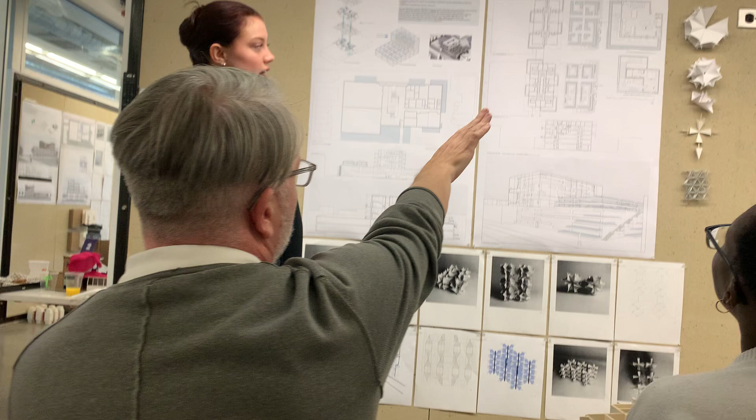No. So to get out to the garden, you'd have to go back down and out and then back up? Or is there an internal way to get up to the garden? No, you would have to come from outside, go out to the garden. Oh, it's just there out there.

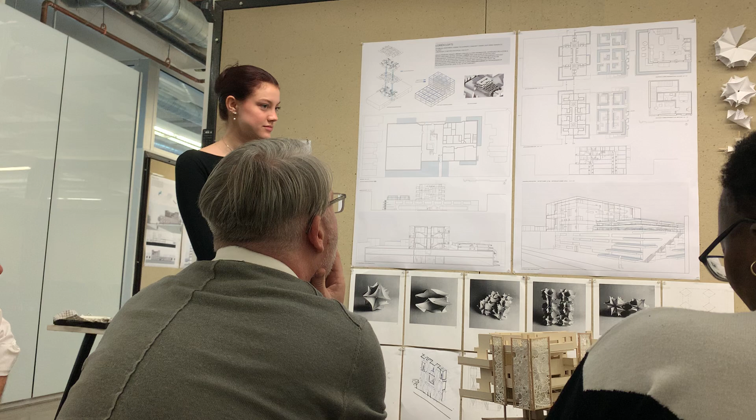And that's because it is for public use, and it's really trying to highlight that anyone off the street could walk up. You're extreme, like you're either all or nothing.

She's taking a position. Yeah. I am. It's an apartment building for hermits. I appreciate that.

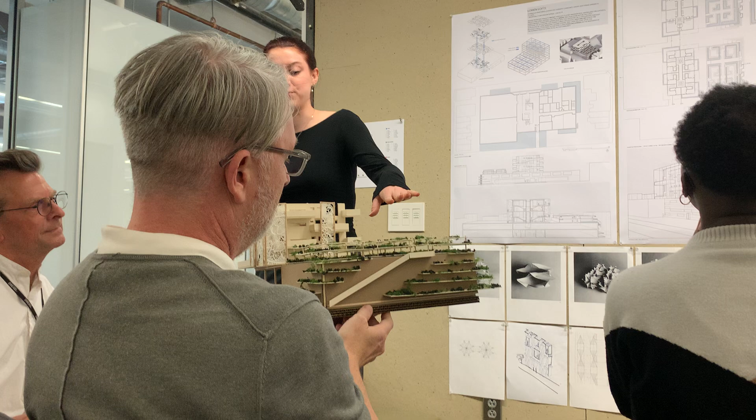I think she thought of it as a point of security, though. Yeah. Security, I'm sorry, because anyone is able to access the top, just keeping it closed off from the residential, securing these spaces from those folks. Yes, got it.

I think something that would get you more oriented graphically is labeling your spaces. That helped, and also you have your third above your fourth, so I was getting them confused. Totally. So, but I agree, I do like...

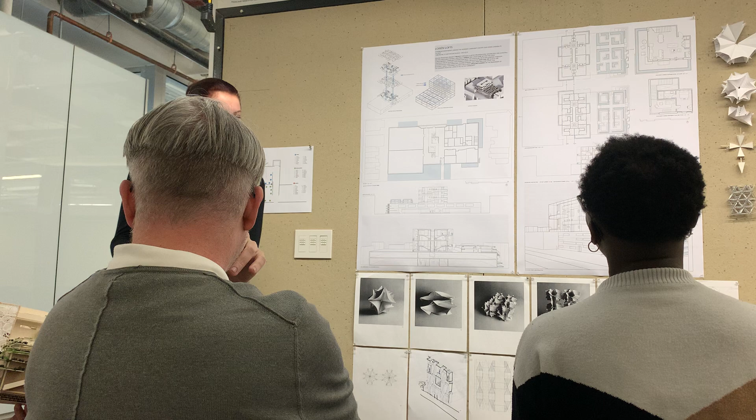As a very introverted, reclusive person, I really like just going up and going straight to my apartment. That kind of works well. It's very, not spiral staircase.

And then it gives, there's not an excess of hallway space. It's kind of just in and out. Very minimal.

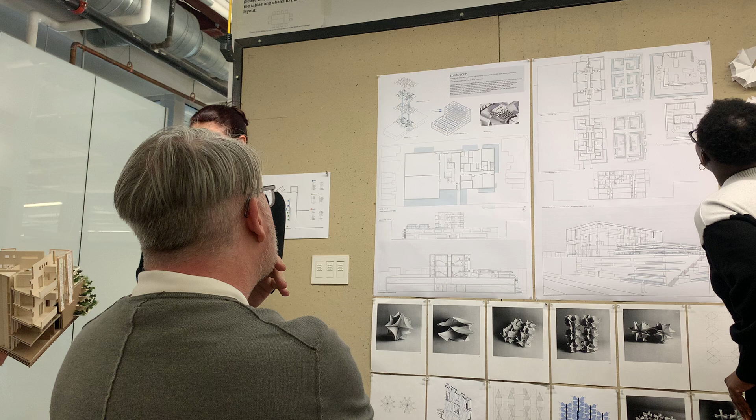Yeah, I mean, I love the representation of this. I think the drawings are beautiful. Thank you. I love the real efficiency of it, both in terms of the concept. When I say it's extreme, I really appreciate that.

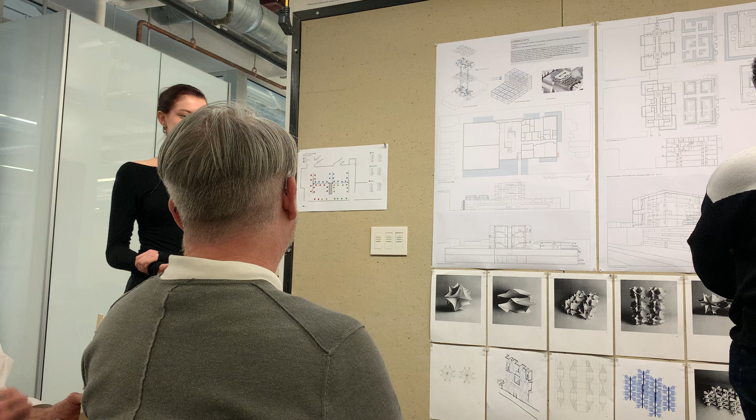Thank you. Because in a lot of these other projects, we get this architects' sort of utopian ideal of the social aggregator space, like we're all going to get together in the big happy communal space, and we're all going to have the serendipitous encounters, and it's all going to be great and fun. And does it always work? Maybe sometimes, but sometimes you just want to get in your apartment and be by yourself, and that's fine, right?

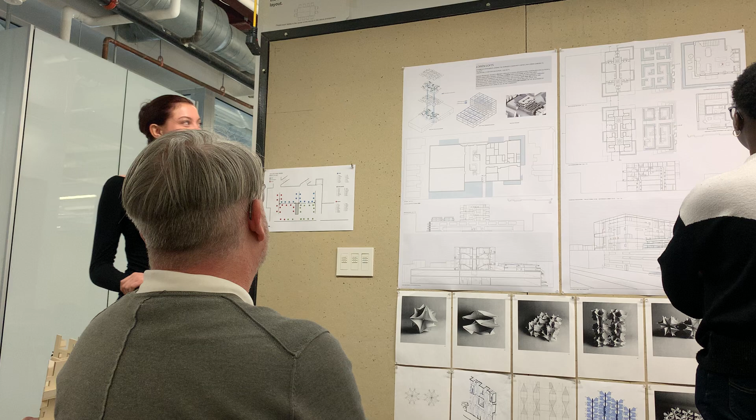Yeah, right? And you've created the building for that, and I think it works. You've got sort of the logical sequence of diagrams that goes from the conceptual, the abstract, the organizational, jumping through the scales down to the unit layout with this stacked bi-level unit with the furniture to explain to us how all of this logically works. And then you create this amenity off to the side, which is the great visual amenity on the roof, where you can't step out and go visit that unless you go back out. It's an intentional gesture, to go back out onto the street and go participate in that.

And I really appreciate that. That said, you forgot the fact that they're duplexes too. Oh no, I said that. Oh yeah, the split level thing. Oh yeah, I love that, because that's part of the compact efficiency of these units.

I think there's a practical issue with this single narrow stair, which is actually kind of cool. Yeah, here it's incorrectly shown, but here and here you can see there's breaks every so often, the landings. Or do you just mean in general the fact that it's a straight run? No, there's just one stair that takes you up. As an urban gesture, it's kind of exciting.

Like, where else does that happen? I think Mario Botta's SF MoMA does that, the urban stair that's just a long single slice that takes you up to this roof garden thing.

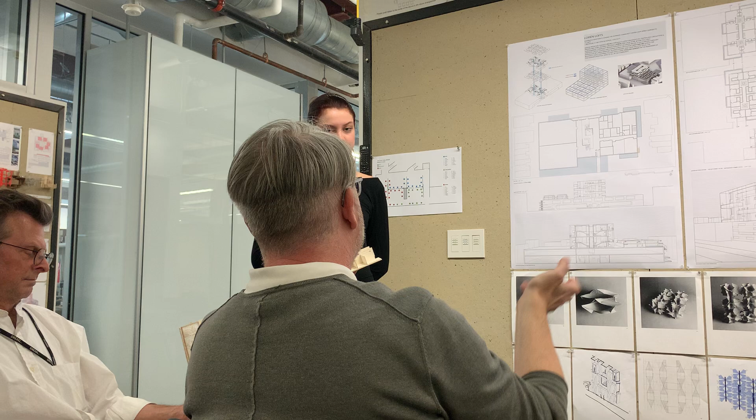But also, there's the practical issue of two means of egress and accessible access. It's kind of redundant, but the elevator lets everybody get from the community center up to that level. Again, from a generosity and practical standpoint, if you're in the community center, do you want to give people the option to get up to that roof, versus no, everybody out onto the street and back up the stairs?

And where I would probably challenge it, it's not necessarily working yet, is right here. Not these guys, but this, the patio. Part of it's a material question in the model, but also, should these be solid or should they be like a grate? There's something in between this interior space and this screen. Like, are these horizontal screens? I don't know, but it seems to me this could be interrogated a bit more for its status as being in between the outside and the inside.

And that in-between is, I think, a really important thing, because how one thing touches the other, using the word intentional, begins to really matter. How does this touch this, as this kind of—what's the word I'm looking for—disintegration of a solid? Going from this solid mass, that stair tower, it's like bam, and then this disintegration into, you know, all that is solid melts into air, Marshall Berman—RIP—and so there's that. That's kind of my comment for this part.

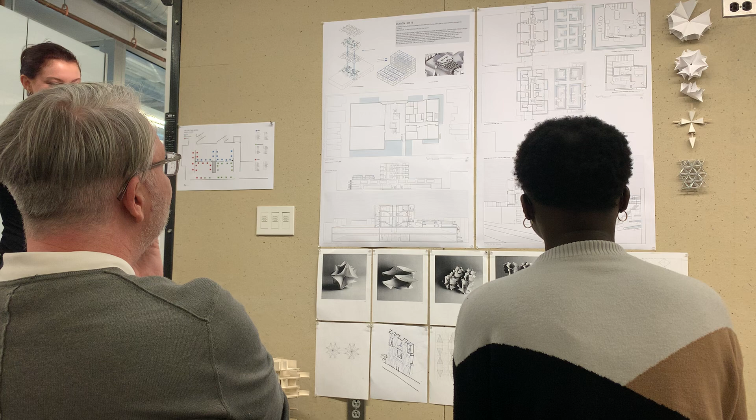You're my saving grace. I'm thinking that's an opportunity there to kind of create that porous connection to the skin. My question is, what are you envisioning the skin to be? Because I was also looking here. I didn't want to make this too dense, but these strips going down would be that screen, and you can see them in plan as well.

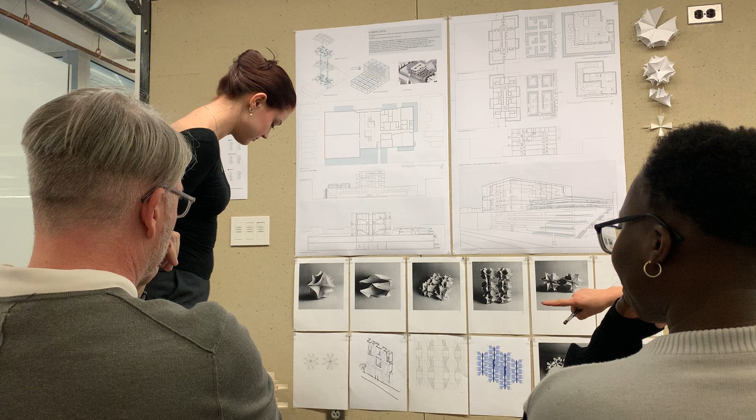I think for future reference, she did the doily as a representation of the screen, but there's actually an architectural representation she found. I think what we should do is put a picture of that here and then put the doily next to it. Yeah, that was my intention. Future note, right, I didn't think of it either until now. I was like, oh, it's nowhere.

So as I'm thinking about this, and as you talk about the labyrinth, the other direction this could go is—what's interesting is you've set up two projects in a way for yourself, right? This is the self-contained private precinct project, which is super resolved, and it's great. And then this is the super public zone now. And I wonder, is that really the space for the super public?

In contrast to the super private? Yeah, I don't know, I'm wondering if that really is the super public space that wants to be more urban and open. I don't know, because—I mean, you think it should be a super public space. Yeah, that's actually a really interesting contrast. I agree, and I don't know that that says super public to me.

And then to the idea of threshold, it puts a lot of pressure all of a sudden on the zone. And what is that liminal space? Why is it that dimension? Does this now touch that facade? Right, why or why not? And what happens in that space? And what's the relationship?